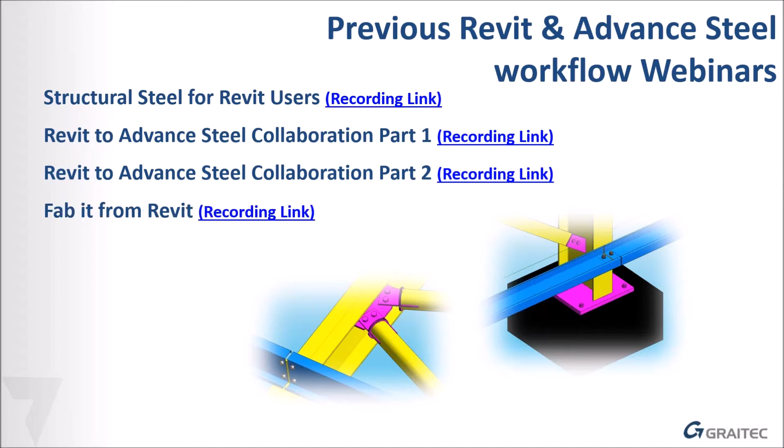And today's webinar is going to be a brief overview of the workflows between Advance Steel and Revit. John Bennett and I did a series of 4 webinars in August and September last year, which went into more detail. I have embedded the links into the handout so that you can get a copy of that recording. I did a structural steel for Revit users, going through the new steel tab in Revit 2019. John did Revit to Advance Steel Collaboration Part 1, where he went into the mechanisms and how everything worked and why it works. We broke that down into 2 parts. And then finally, I did a webinar on, once you've got a model from Revit to Advance Steel, some of the checking tools to make sure that everything has been modeled correctly. So just some extra webinars there in case anyone missed them.

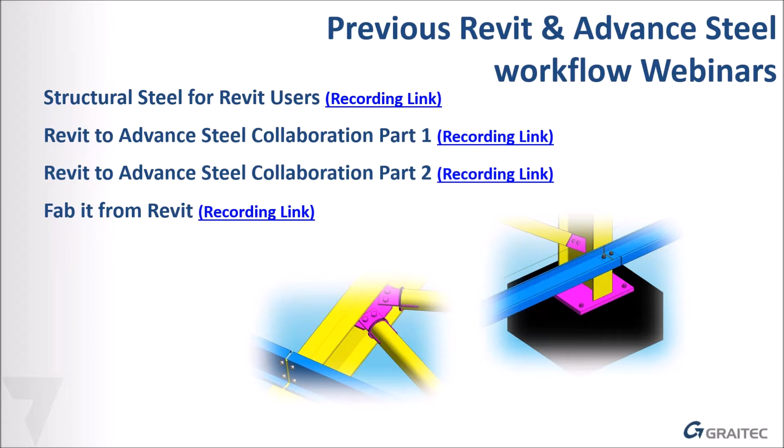So an overview of what we're going to look at today. We're going to look at the Advance Steel extension for Revit, the SMLX transfer, what will transfer, what are the differences between the various versions. Then we'll look at the actual extension settings. Then we're going to look at some Advance Steel to Revit testing, and then finally some Revit to Advance Steel testing. And after that, I will run a synchronization on a simple model just to show you that it's not just finished models that we can send back and forth.

So the Advance Steel extension for Revit. Start with Advance Steel. In Advance Steel, you don't have to download anything. All the import, export, synchronization are already installed and come as part of the standard Advance Steel.

Just make sure this is recording. Yes, it is.

And in Revit, before 2019, the extension needs to be downloaded from the Autodesk App Store. Just search for Steel and download the correct version. As you can see from that screenshot, there are different extensions for different versions. And it's always best to ensure Revit's closed before installing an add-in, same with Advance Steel. The 2019 version isn't in the Revit store. It's actually downloaded straight from your Autodesk account. So if you go to manage.autodesk.com, log in and then go to your product updates, you will see the Advance Steel extension for Revit 2019. So that's where you get the 2019 version.

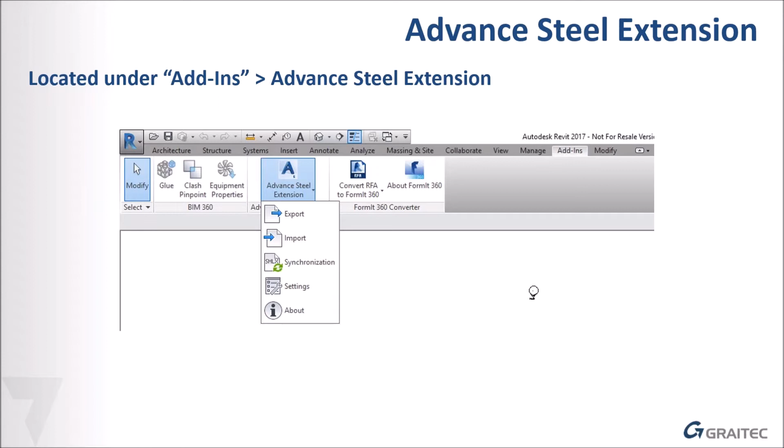So once it's installed, it's located under the Add-ins tab, and it's the Advance Steel extension. So then we've got obviously export, import, synchronization, and the settings. So we'll go through all of that today.

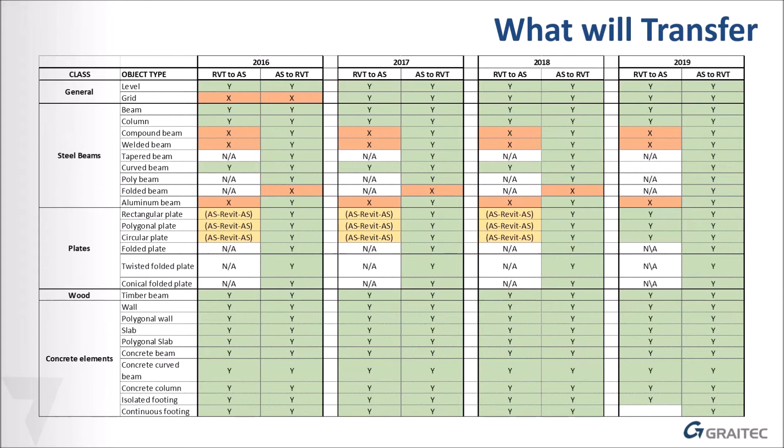The main sort of areas to cover are the 2019 version. They added so much more, mainly due to the fact that there is now a steel tab in Revit, so it recognizes a lot more things.

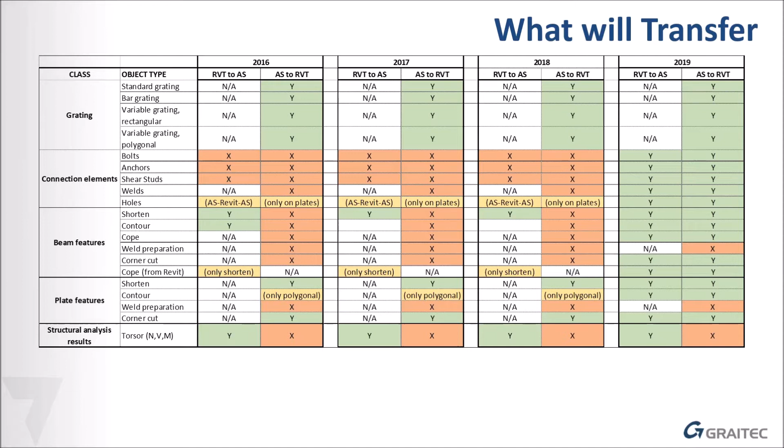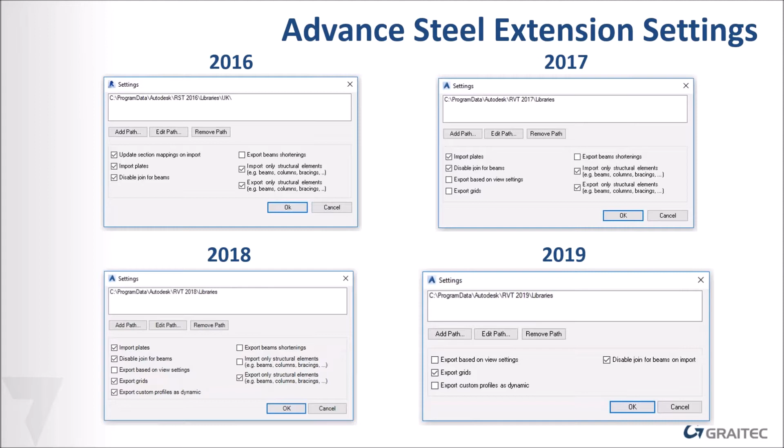That's not because they've taken any of those features away. They've just rolled them actually into the extension. So for example, if we look at 16, you could choose whether you imported plates or not. On 19, that's just included within the extension, so everything imports straight away. So we'll just go through an explanation of some of those settings.

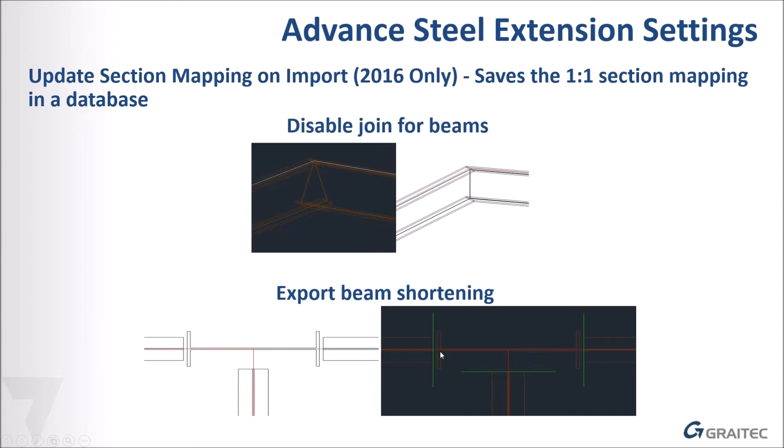Export custom profiles as dynamic. So this is where John Bennett went into a lot more detail of how it exports everything. But basically, if you have a custom family in Revit, if you don't have the corresponding section in Advance Steel, it will export it, and you can export it as a dynamic profile so that you don't need to have those sections existing in Advance Steel already. It generates it on the export.

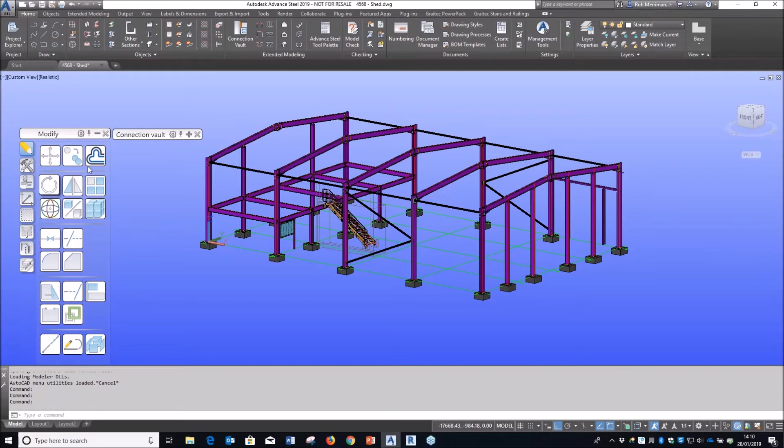So everything in here has been finished. I've got a staircase in there. I've got a little bit of grating in there. That staircase has got some folded treads on it. So just to show you that we can import and export all of this.

So in Advance Steel, I'm just going to go to the Export and Import tab, and we're just going to export. We'll put this onto the desktop, and we will call it Webinar, so I know exactly which one it is.

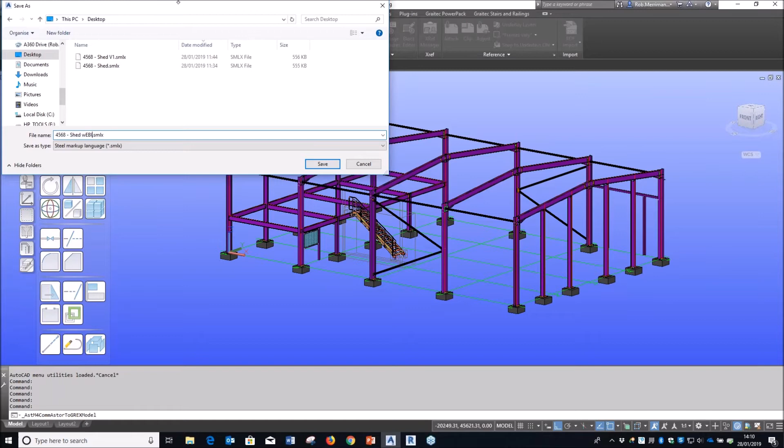And you see in the bottom right it's exporting, and it will just pop up when it's finished and say it'll warn me that it needs to save. It should do. I haven't changed anything, so it's not going to bring me that message. So that has now exported.

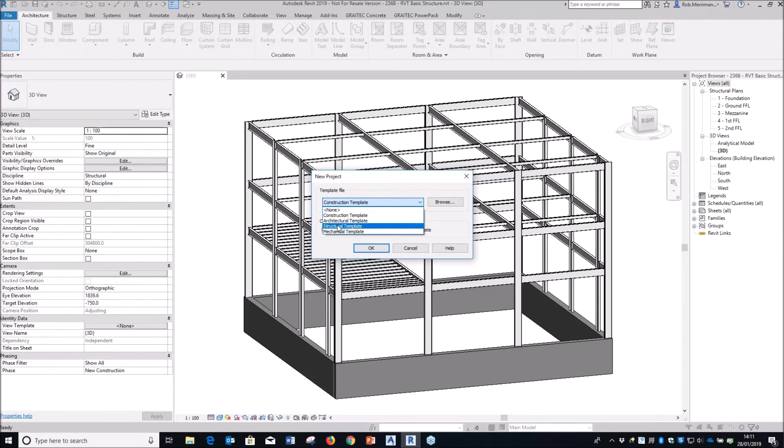So what I'm going to do is I'm going to start a new Revit project, and we're going to start a structural template. There's a couple of little bits I'm going to do. I'll do these, and then while the import is working, I'll just run through what I've done and why I've done it. So I'm just going to go to a 3D view.

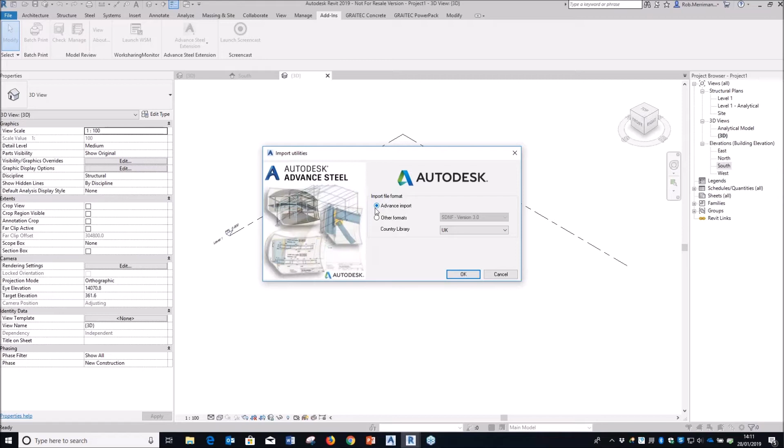So I'm going to go to the add-ins tab. I've got my Advance Steel extension, and I'm simply going to import. Now, when you import, it automatically defaults to Advance Import, which is the SMLX file. So that's the steel markup language. So we'll choose the webinar option, and we'll just let this import. So this is going to take 2 or 3 minutes.

So I'll just waffle on a little bit as to what I did when I opened that Revit structure file. So that is the out-of-the-box Revit structural template. I haven't done any customization to it whatsoever, just so you can see what you get out of the box. If you're doing this a lot, what we would advise is you actually start setting up a template for importing the Advance Steel models into.

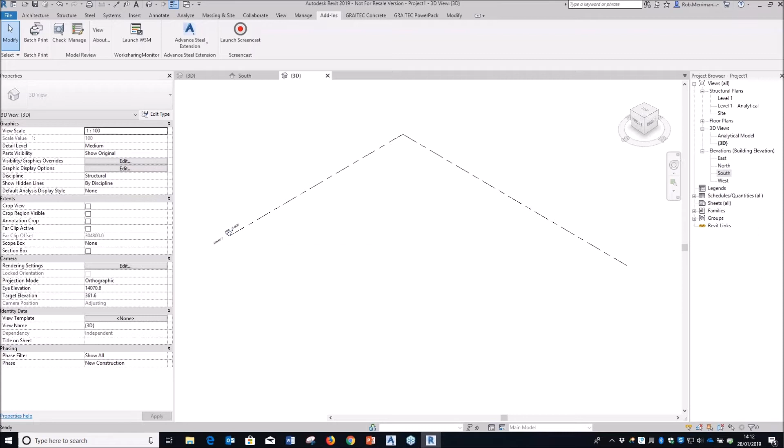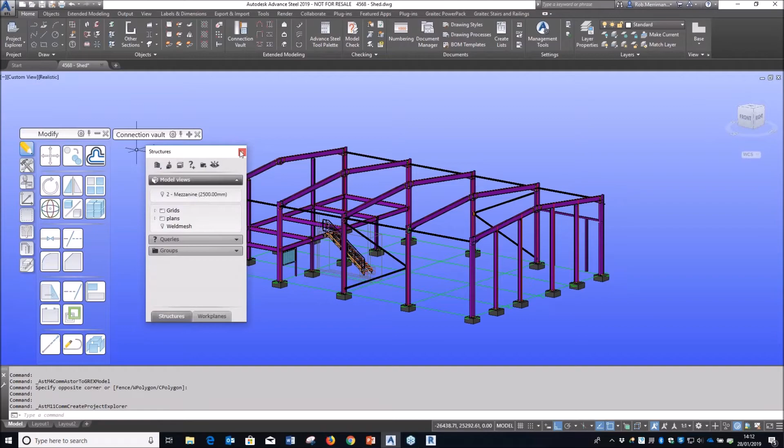What I did, I went to an elevation view and I deleted the level 2, because with the Advance Steel to Revit extension and the SMLX file, if I go back to my Advance Steel model, I do have in here levels. So I've got 2 mezzanine, which is at 2.5 meters. So I don't want that to conflict with any Revit levels that are in there, because it will import all of that information as well. So that's why I just cleared that out, just so you don't get any conflicting information.

So it's just going through. You can see it slowly being built, so it's just importing everything. So we'll just wait for that to finish. I don't have any colors or anything set up, so it is just going to be in a 2D wireframe that I'll show you everything today, but I'll show you what happens when we import everything.

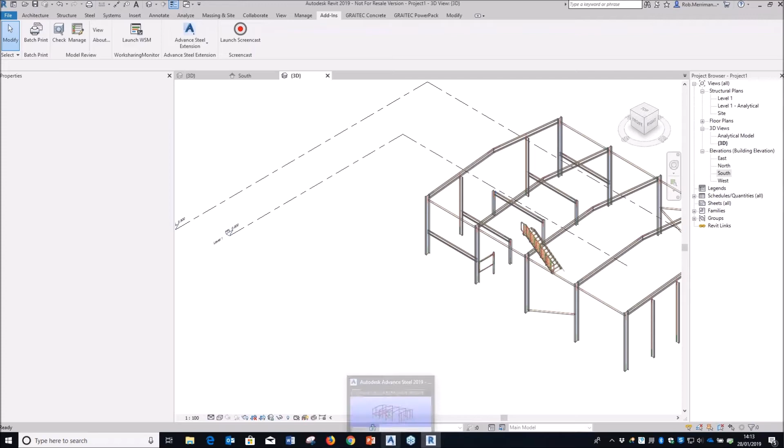Everything in my Advance Steel file has been done with standard Advance Steel connections. So if we look in here, I can go to Joint Properties. This is a single-sided end plate connection, so it will do the shortening. It will weld the plate on for me automatically. It will put the bolts on automatically for me.

Now, in all the different versions of Revit, these connections do actually exist. So in Revit 2016 and 17, I believe they put 22 of the most basic connections in, so end plates, base plates, that kind of thing. And then 17 and 18 and 19, they've increased the amount of connections within the system. So in Revit, you have about 180 steel connections.

So it doesn't just export the plates and the stiffeners and the bolts as individual elements. It actually exports them as steel connections. So if you did need to modify anything in the Revit file, you can modify those connections within the Revit file. So we'll just wait for this to finish.

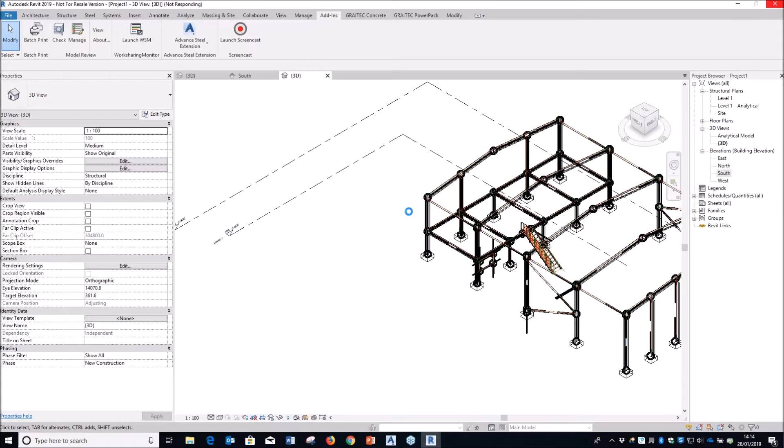But as you can see in here, we are getting these green circles. So these are all my connections. The reason they show up as green circles is because I'm in level of detail medium. If I go to coarse, we just see our lines, our analytical lines and our beams, and we just see the circles for the connection.

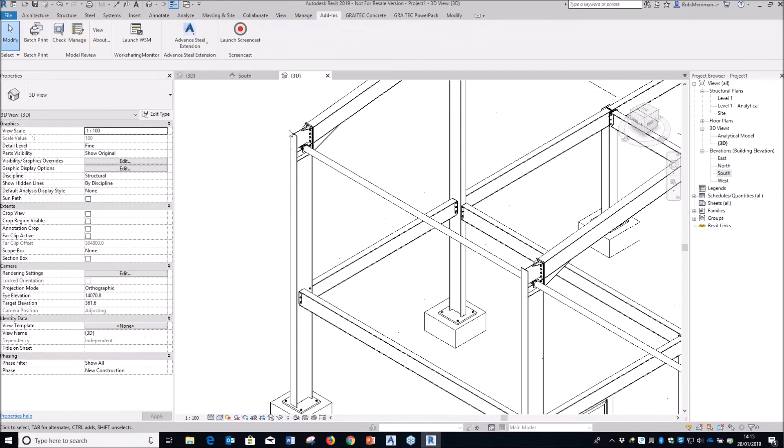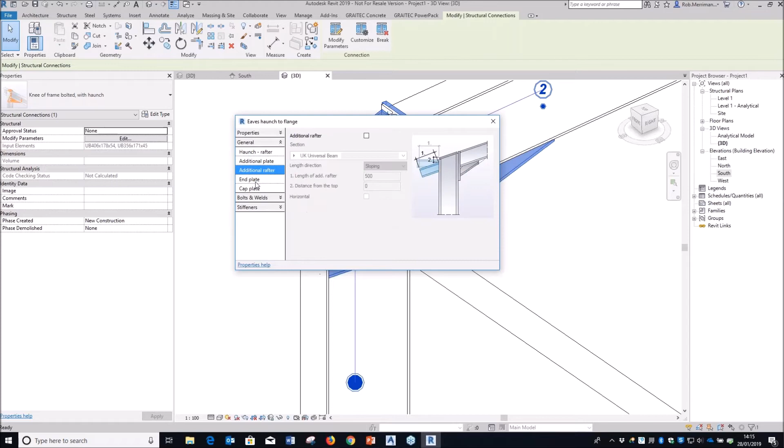So what you want to always be is in level of detail fine, and we'll just go to a hidden view. And you can see that everything is imported. And if I click on this, this has imported as a connection. So I can click on the Modify Parameters button on my Modify tab, and you'll see that it's called Knee of frame bolted with haunch. So I can then start to modify that connection, and it will update everything in here automatically.

So that has brought everything across. If we go back to my south elevation, you can see that it's automatically brought my advanced steel level through correctly. It has as well brought the entire staircase through.

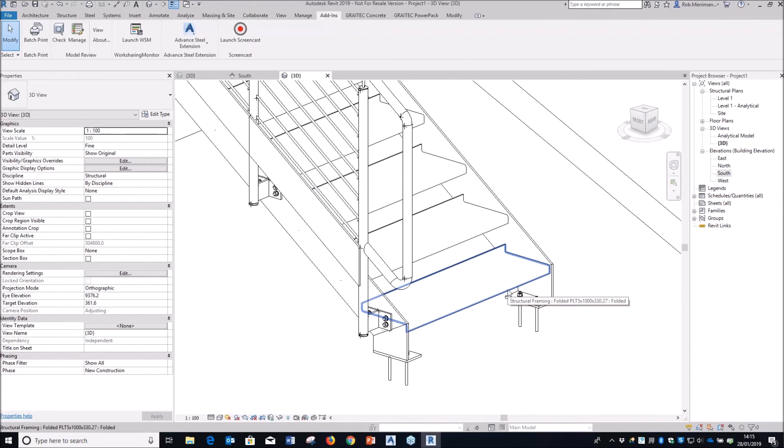Now that staircase had folded plates. Advance Steel 19 does recognize folded plates. And it's also brought through all the connections, all the bolts, all the welds in there. So in the 19 version, pretty much everything does come through.

Obviously, as you go back through the versions, if you refer back to that table, certain things will come through and won't come through.

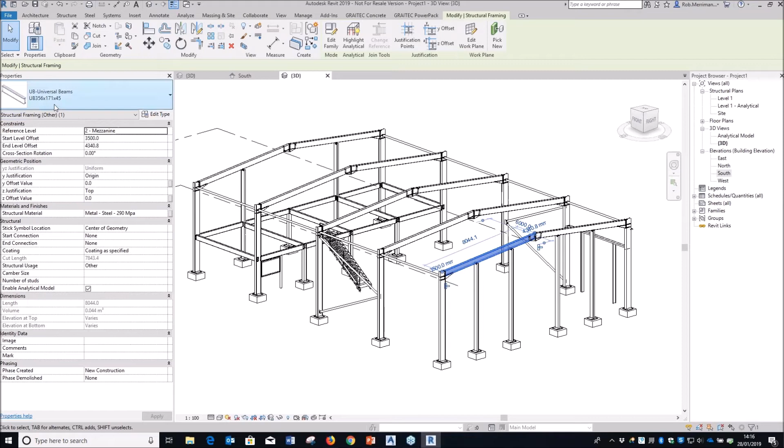So that is if you're an Advance Steel user and you need to create a Revit file, or someone's asking you for a Revit file. It's a lot better format than an IFC, because these are just registered as actual Revit beams, not IFC beams, so we can start modifying them if needed in here.

The same with the concrete. They're all recognized as concrete footings, concrete beams, concrete walls, so you can start using the GRAITEC Concrete add-on if you have it to start doing all your reinforcement if you needed to.

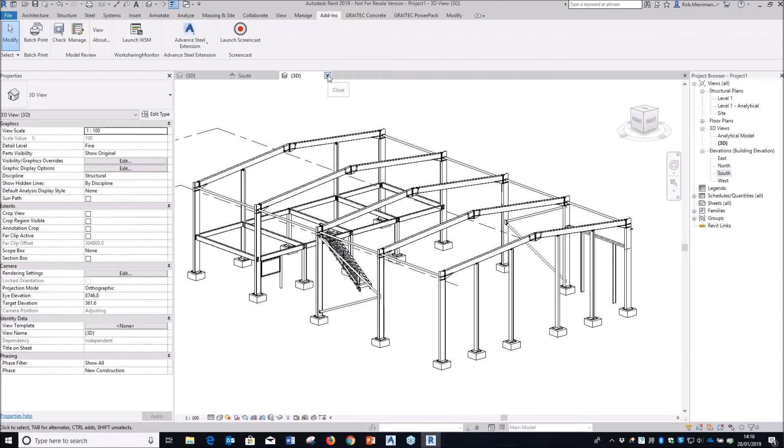So that's going from Advance Steel to Revit. Now a common workflow is the other way. So we'll have a look at the workflow going from Revit to Advance Steel.

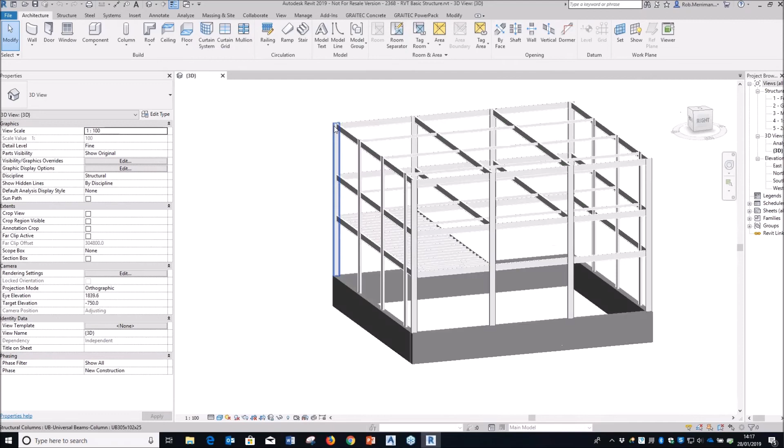So as a general example, this would be if the main engineer, the engineer for the project, and the architect, they've positioned the steels where they need them, but they haven't connected anything up. That then is your job as the steel detailer to actually put the connections on, put the staircases in, the railings, any miscellaneous metalwork that the architect and engineer don't go into that level of detail for.

So what you don't want to do is you don't want to have to model all of this from scratch. You want to be able to bring everything in where they're setting out their section sizes, their geometry, and then it saves you a lot of time in the setting out.

So we'll just go to add-ins. We'll have a look at settings, because I've already got it set up, but I don't want anything to export as a custom profile. I don't want any custom profiles exported dynamically.

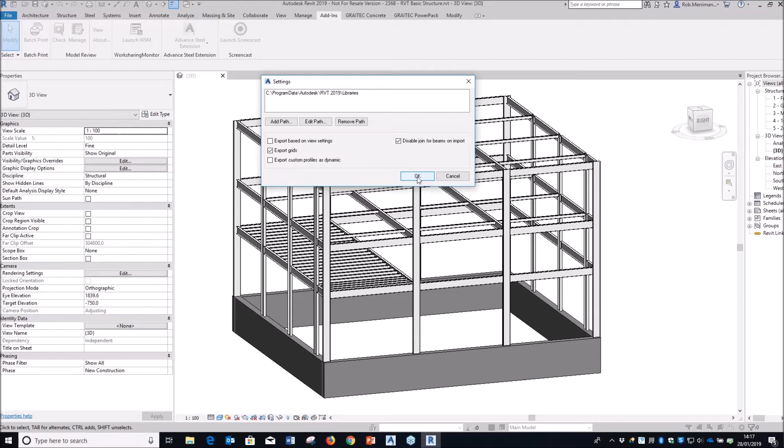The reason that I don't have to do any mapping is these Revit families. If I go to edit type and we have a look in here, there is some identity data. There's a section name key. Now all of these Revit families have been set up with this section name key.

What that does is when we export to Advance Steel, that correlates to all of the databases within Advance Steel, so you don't have to do the mapping of every section every time you want to import like you would with an IFC file. So if you get, we actually had this as a support case on Friday.

A client had been given an IFC file from Revit, and let's say, for example, there were 20 different sections in there. When you import that IFC file, you have to map each one of the 20 sections to the correct database in Advance Steel.

Once you have done it once, that is set up for your Advance Steel, but it does take about 20 seconds per section. So if you've got 20, or if you've got an even bigger model with 50 or 100 sections in, that can take a long time.

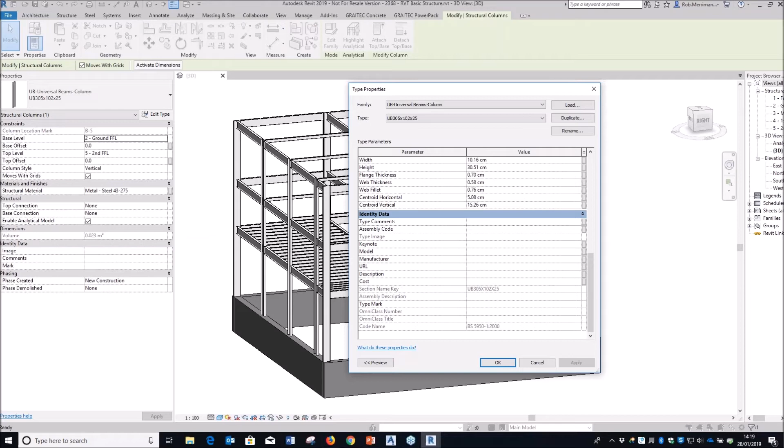It turns out the client had modeled everything in Revit as Revit elements, even with some steel connections in there. So we went through this exact workflow to export it via the Advance Steel add-in, and it brought the entire model through straight away. So if we go add-ins, just make sure nothing is selected, we'll go export.

We'll export it as the advanced export, and we'll put this on the desktop as that file. So that has now created an SMLX file on my desktop.

So we'll start a new Advance Steel template. It's important you start with an Advance Steel template, not just an AutoCAD template, because there are layers and hard coding behind the template for your Advance Steel objects.

So we'll just go to a Southwest isometric view, and we'll go to realistic. So we'll go to the Export and Import tab, and then we'll import from Revit. On my desktop, we'll click Open.

The only thing you might have to map, and it won't do it for me, I put a clean set of data in this morning.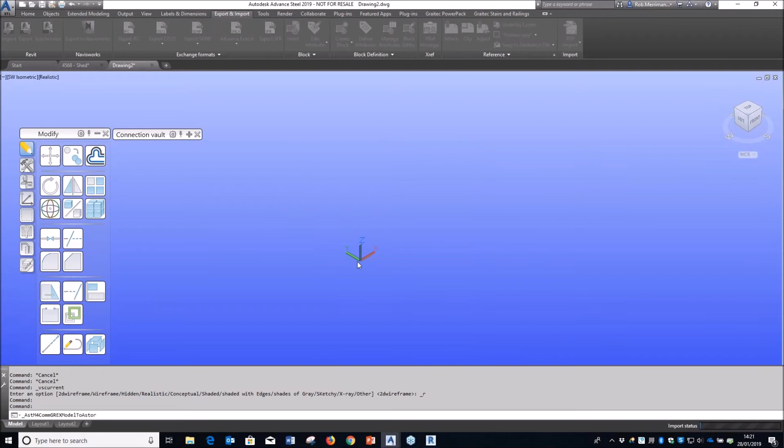So these are all my Advance Steel materials. So I'll map this to S275JR, and I'll probably get a pop-up for the concrete. So for the default wall, we'll just put it in as one of the C's. We'll put it in as C30. Now these mappings are stored in a database, and it won't ask you this every time.

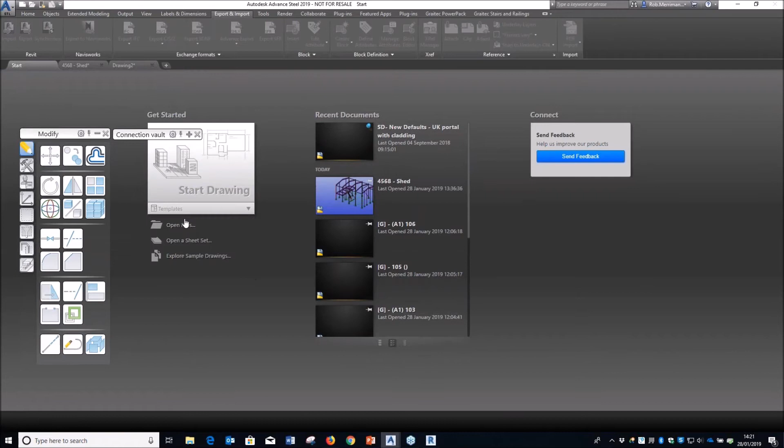So once I've done that mapping, if you just click a random section, it will do that mapping every time. So if I start another new file and re-import, you see this time it hasn't asked me to map the material grades, and it's mapping to S275JR.

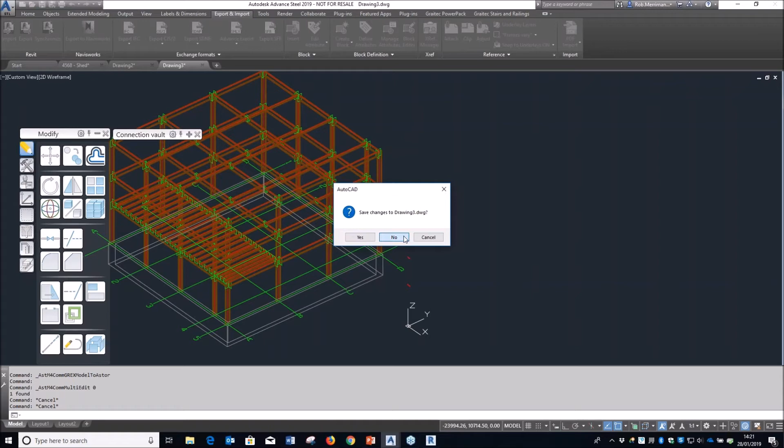So that is set up in databases. If you do make mistakes, we can go in and delete those entries from the databases, but just something to be aware of: don't just click OK on every one, because that mapping will take effect on every model you import from then on.

So what I'll do, I will just save this as imported from Revit, so we know what we've done with it.

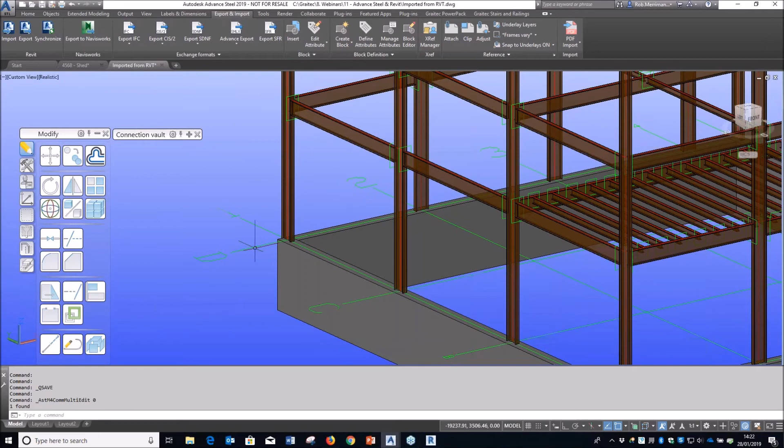So you can see it's brought the walls in, and they are now Advance Steel walls. It's brought the grids in, and they are Advance Steel grid lines. And it's brought, obviously, the beams and the columns, and they are Advance Steel beams and columns. So they're not IFC beams or IFC elements. They are exporting from, if you go from Revit to Advance Steel, they go from Revit beams to Advance Steel beams. Obviously, if you go the other way, the same happens.

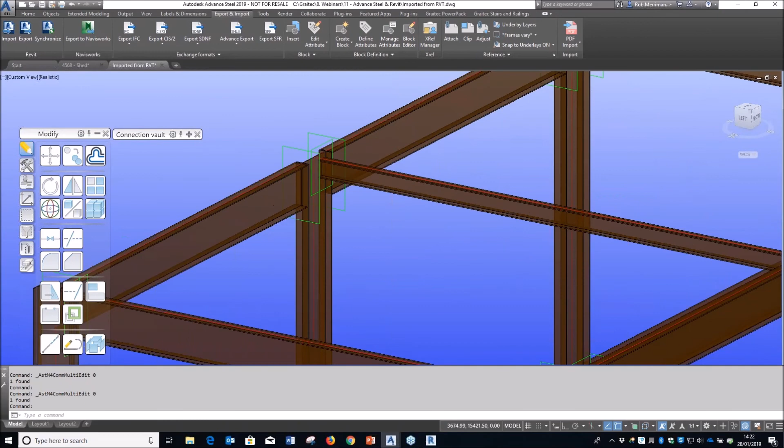Now, the only thing to bear in mind is in the 2019 version, I can't turn off the export of shortenings. And if I go to put a connection on here, if I put a single-sided connection on, I will get two shortenings.

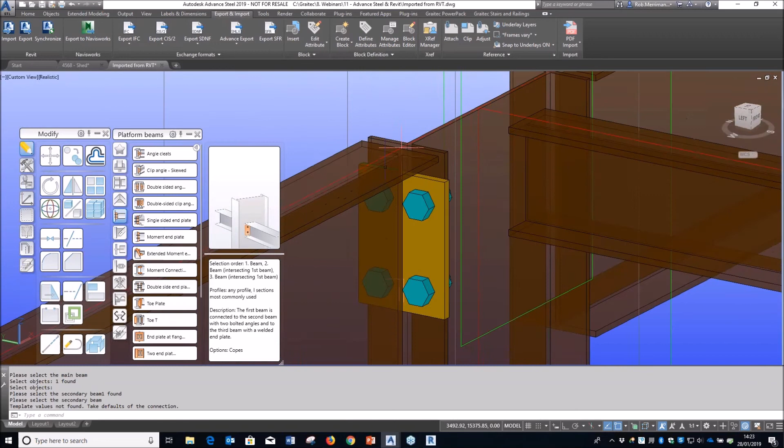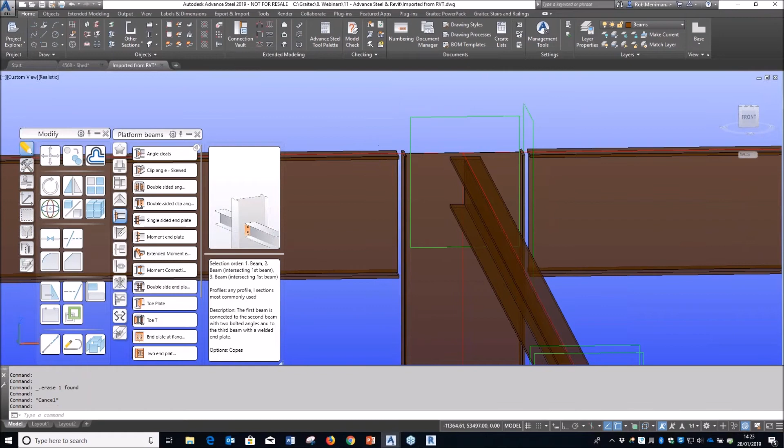So if I did a model check on this beam — these are just some of the Advance Steel checking tools — it should have told me that I have overlapping shortenings. So in theory, if that beam got sent as an NC file, it would want to put two cuts in it. You can see there I've deleted the connection, but it's left the shortening from my Advance Steel, from my Revit export, sorry.

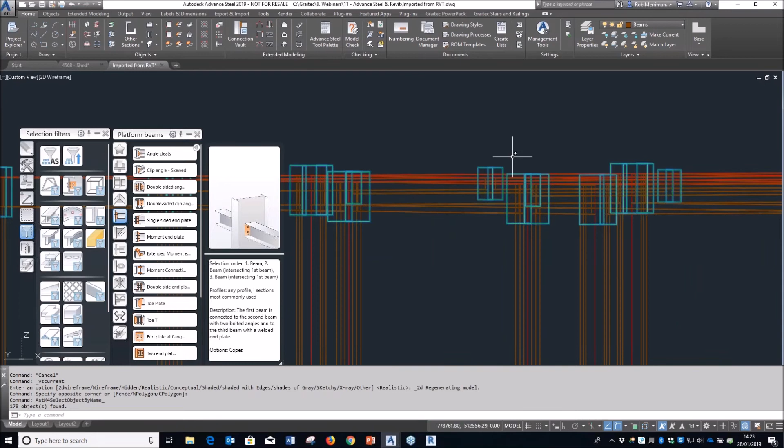So what I'm just going to do is go to wireframe, and I'm just going to tidy that up. I'm going to draw a window around everything, go to my selection filters tab, and we have a filter for beam features. So that's all the features selected. I'm just going to delete those so that all of my beam elements are now noding out again.

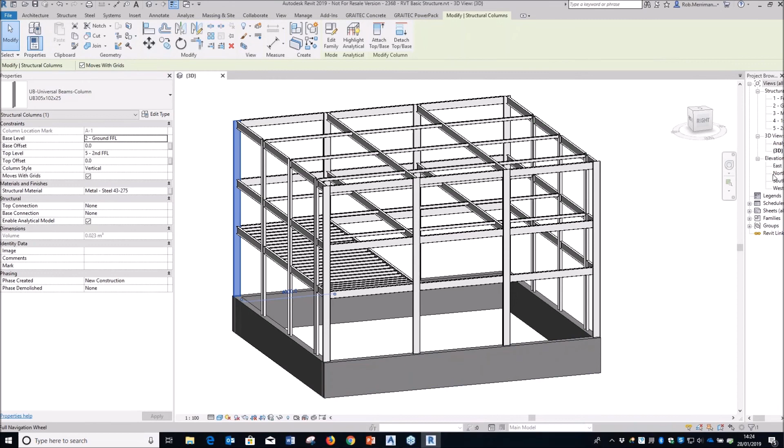You can see that, like when I went from Advance Steel to Revit, it brought the levels through in my Revit model. If we have a look what I have set up in here, I've got foundation, ground, first, second, and mezzanine, just hiding in there. They have brought through as they are now Advance Steel levels.

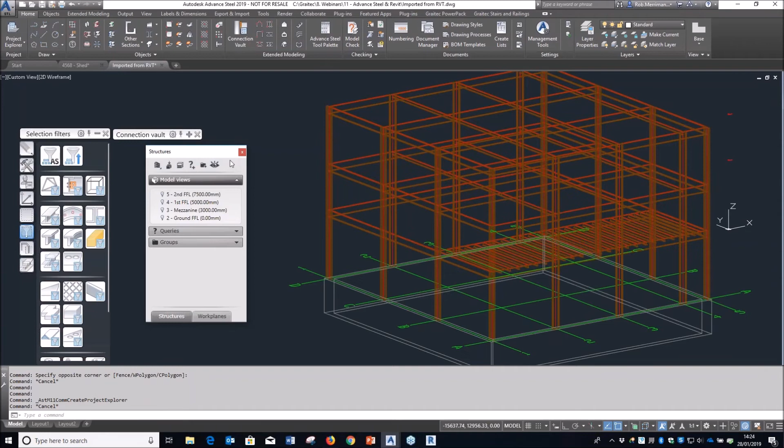So we can start to isolate the areas of the model that we're working on, just like we would in Revit. So what I'm going to do — that is the export the other way, so from Revit to Advance Steel.

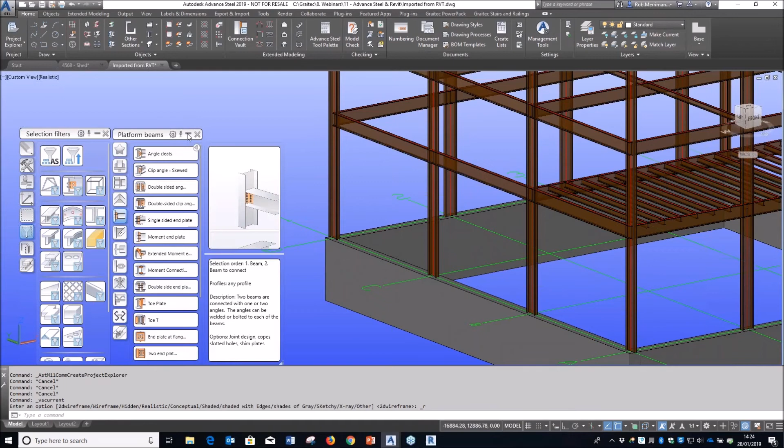What we would then do as steel detailers is obviously populate this model with the steel connections, run the fab drawings, get it sent out into the workshop. So what I'm going to do, I'm just going to put a few steel connections on, and then the last part of today's webinar, we will synchronize it back with our Revit file.

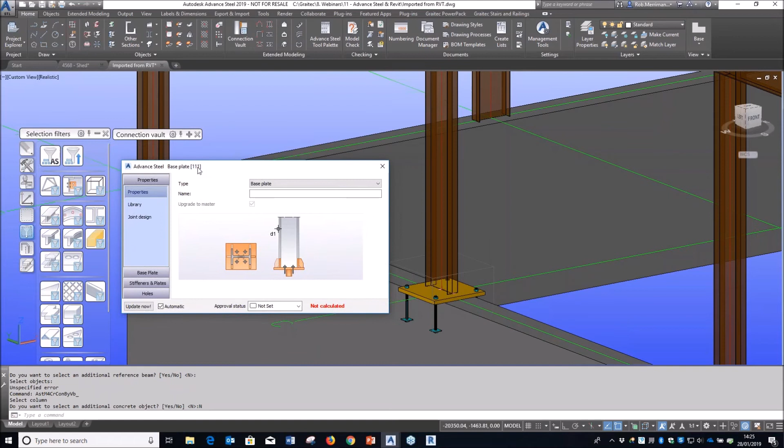I don't want to do that, so we'll just put a base plate on. I'm not going to associate it with concrete today. We'll just put a few connections on and copy them around just to show you how we can copy things around multiple times with the association. So we'll just tidy this up a little bit.

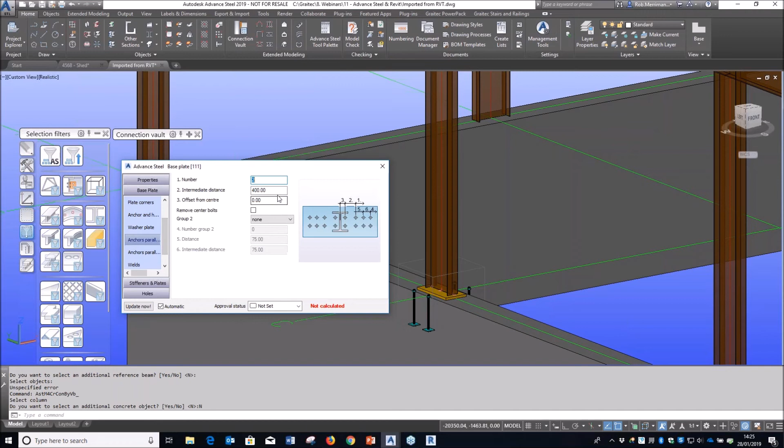Okay, we'll make that — we'll go 200 that way, 200 that way, 100 that way, and 100 that way. A little bit small, but that's okay. We'll just put some... and we'll go 80 that way. So what I can then do, I can copy that round multiple times just by selecting the columns.

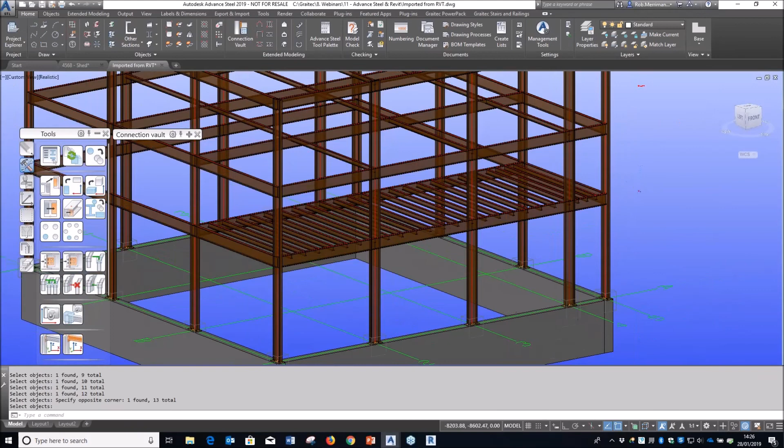And that has now put that base plate on every column for me. What we'll do, we'll just put a couple of connections on the top here, and then we'll send it back to Revit with those connections on.

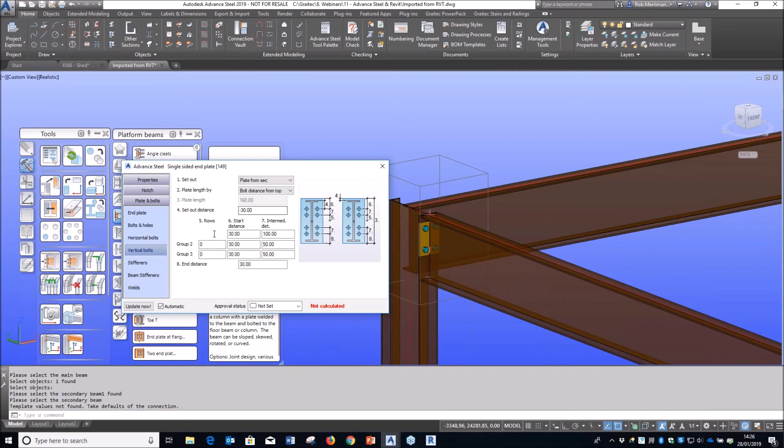So we'll look a little bit heavier on that section, and we'll put 3 in there. That'll do. And again, I'll copy that connection around multiple times. So what I'm doing here is just selecting the main beams.

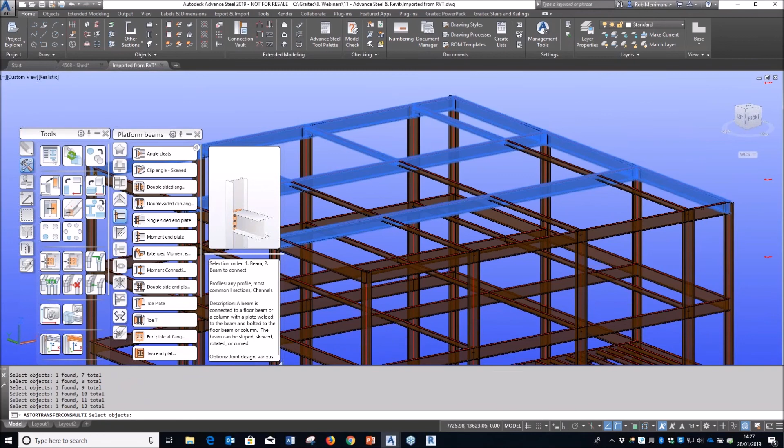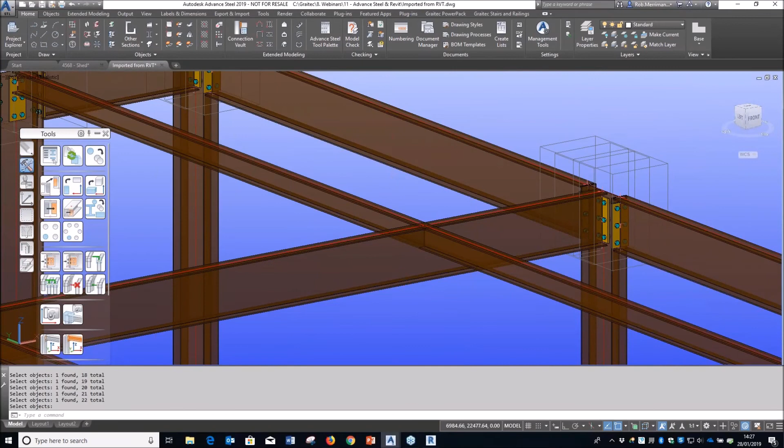And then what I'm going to do is just select all the beams that connect into those. Might look a little heavy on those small sections, but for a demonstration it'll be fine. That will put those connections on, so it looks a little bit silly there, it's quite a bit too big, but you can see that using some of the Advance Steel tools we can populate the model very, very quickly with the joints.

What we'll do, just to show you another one, we'll put a double-sided end plate connection in here, just to show you that it will send the bolts through both plates.

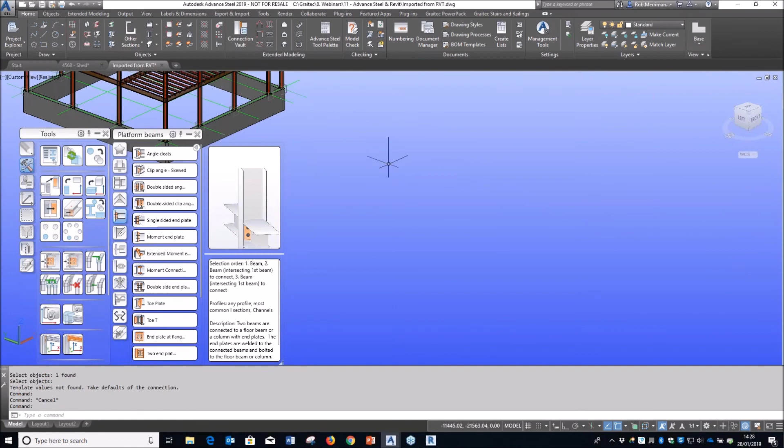So what I'm going to do, we'll just save this file. The last little bit of today's webinar will just synchronize back to this Revit model that doesn't have any connections on. So what we'll do, we will...

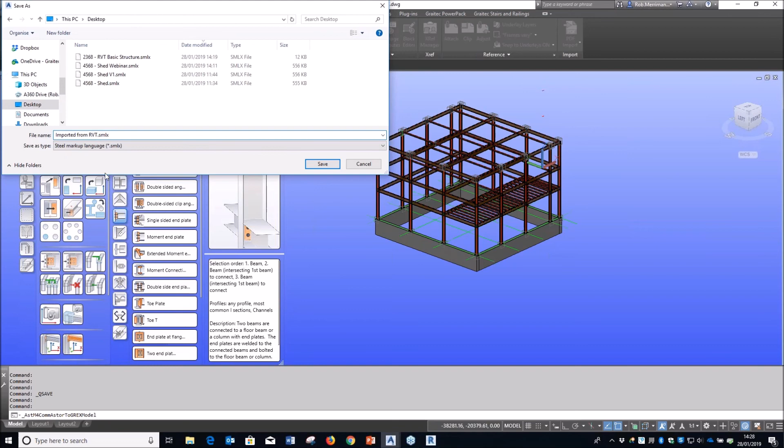Export. We'll call that out, so we're going back the other way. Let that export.

We'll come to Revit, we'll go to our add-ins, the Advance Steel extension, and we'll go to synchronization. So what we'll get is another dialog here where we can load in the SMLX file.

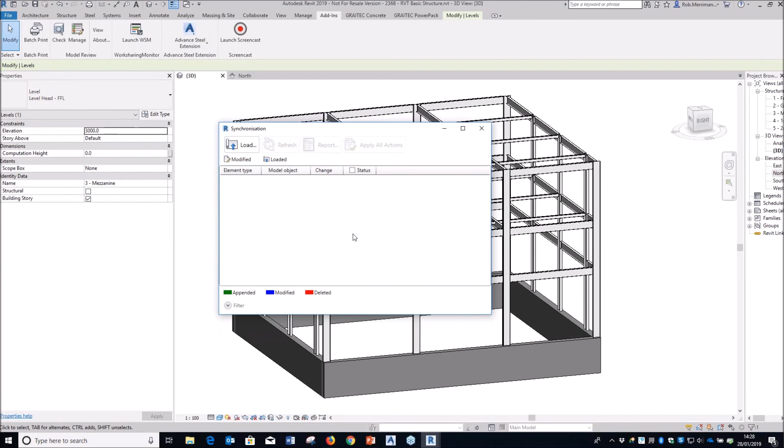It will then compare everything between the two models, and this is where you can see that some things have been modified, so it knows that I've changed the material on the beams and the columns when I was mapping.

So this is why, if you go back and look at the longer webinars that John and I did, we do recommend that if you're modeling in Revit and you're doing lots of steel work, you actually create an S275JR material, and then we won't have all of these material changes.

What I can do is, it knows it's putting these connections on, so I can select those, tick the button, and then click Apply All Actions. Even though I've ticked Apply All Actions because I've got just the connections ticked, it will just go through and populate that model with those connections.

I don't know if you can see it, just a couple of bolts appear in there, so we'll just give it a second to come back to us. You do have to be patient with the synchronize, which is why if you are sending a huge model...

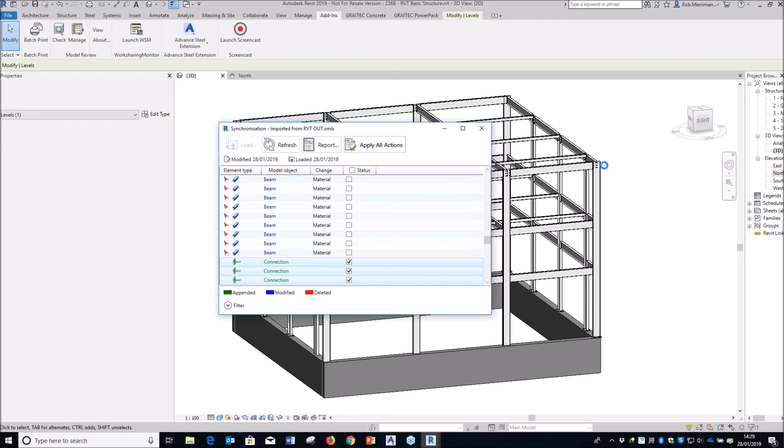We sort of think it's best practice to have... okay, so it's actually warning me that I have two connections on top of each other, which if I went back to my Advance Steel, just while that's importing, that's the way I copied that joint around.

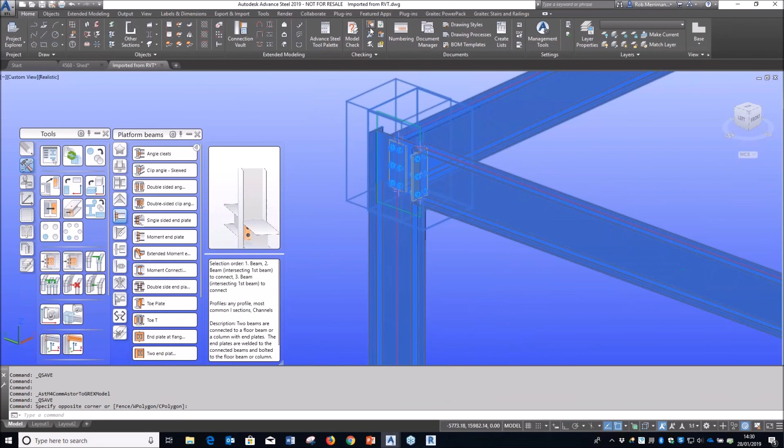In Advance Steel, we do have checking tools. So it's telling me that I've got 3 sets of bolts and 2 end plates clashing with each other. So I've got a double joint in here, basically.

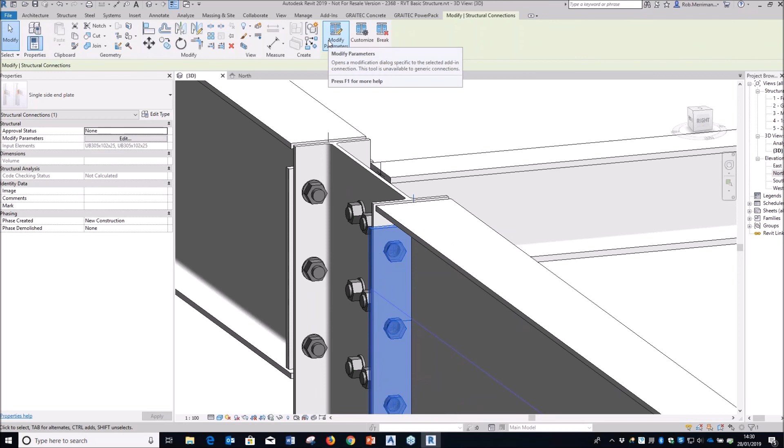Click OK on that, so that is the synchronization. So now we can see all of those connections have come through as, again, they are connections in Revit, which can be found in the Steel tab, and Revit recognizes them as connections. And then in here we have that single-sided end plate.